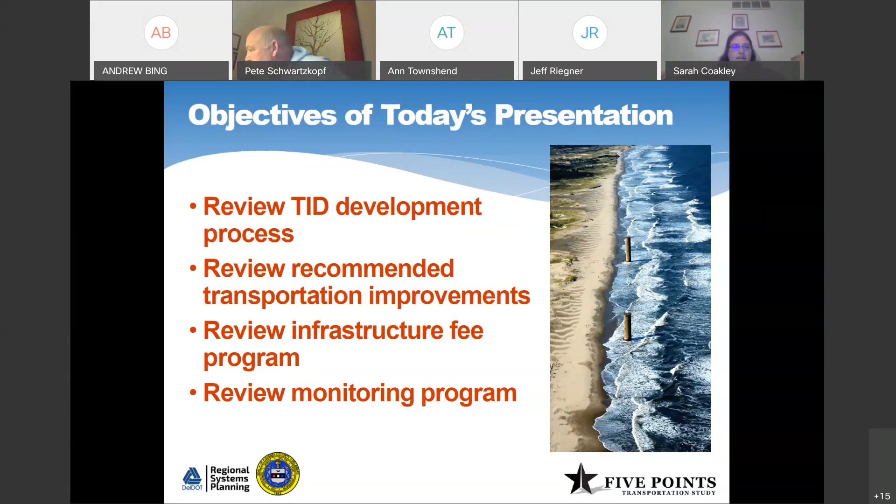So you may be wondering why we created the Henlopen TID. This slide covers the benefits of creating a TID. Sometimes we find ourselves developing improvements through DelDOT before we know all the traffic that they're intended to serve. The district process allowed us to plan more comprehensively so that we've already identified a list of transportation improvements to meet the needs of the anticipated future land use. Projects in the district's capital transportation program also advance in DelDOT's capital transportation program.

We have a 6-year transportation program, and projects within the TID get extra points in the ranking system that's used for prioritizing projects to add them into our 6-year CTP. The fees collected for the district function as transportation impact fees. So for the system to be legal, we have to use them on the district for which they're collected. The TID fees stay local and can only be used for the projects in the TID.

Oftentimes we hear from developers that they're not being treated the same as their competitors, and the district's fee schedule will at least reduce those complaints. The district's fee schedule also provides known costs for developers.

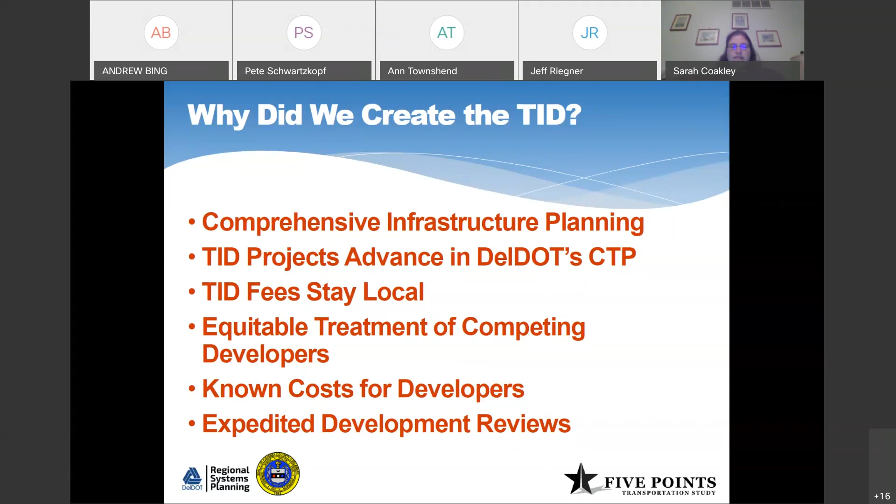They'll even be able to know what their costs are for transportation improvements before they even buy the land or buy into a project. And then the TID traffic analysis that was completed replaces the requirement to do a traffic impact study and make off-site improvements. So in that sense, development can move forward a little bit quicker than it normally would. The traffic impact study process can take 6 to 9 months, and that is a part of the process that developments consistent with the land use forecast for the district won't have to follow. Next slide, please.

So this slide shows the target horizon year of 2045, and this was the estimated build-out year for the land use forecast that Sussex County provided, and also for the transportation improvements. And that assumes a full build-out of the future land use forecast, which obviously may or may not happen by 2045. The target horizon year can be adjusted when the TID land use forecast or transportation plan is revised.

The pink area on this map is the participant boundary, which is the land area or parcels covered by the TID requirements. The purple segments and green intersections are the transportation facilities where the service standards apply and where transportation improvements have been identified. Since development in the TID impacts facilities outside of the TID, you'll notice that some segments and intersections are outside of that pink participant boundary.

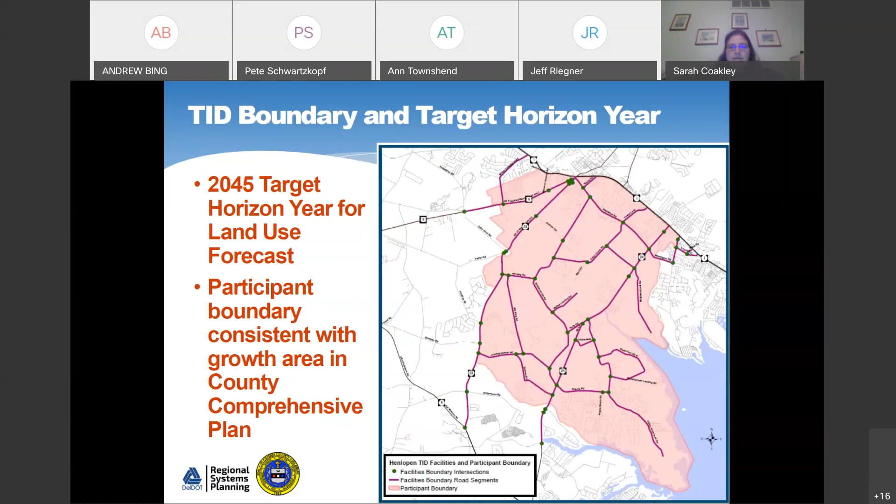Sussex County Planning and Zoning provided a 2045 land use forecast in May of 2018 based on existing zoning. This map shows that with the yellow parcels being those expected to have additional residential units, the red parcels expected to have additional non-residential development, and the purple expected to have a mix of both residential and commercial uses by 2045.

An estimated almost 13,000 additional housing units and almost 1.5 million square feet of commercial development is expected within the TID participant boundary by 2045 if full build out occurs. That means if all of the parcels are built out with the maximum land use that they could get. This is what DelDOT modeled in order to identify the needed transportation improvements.

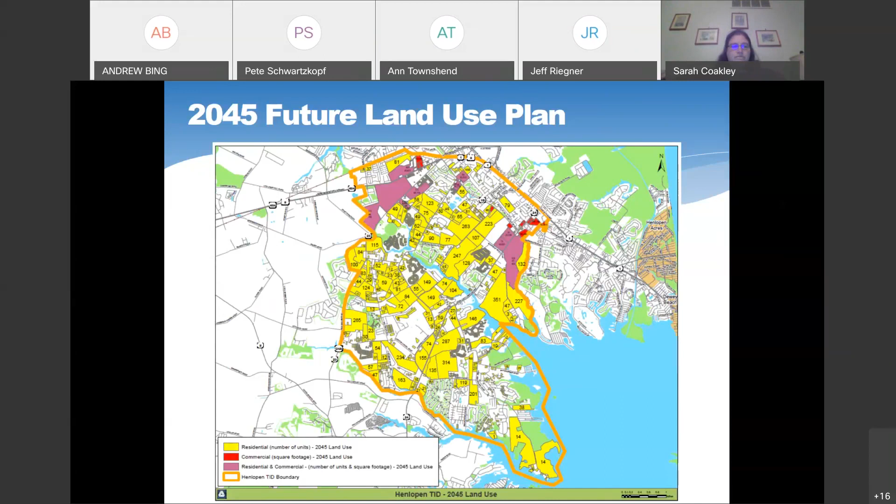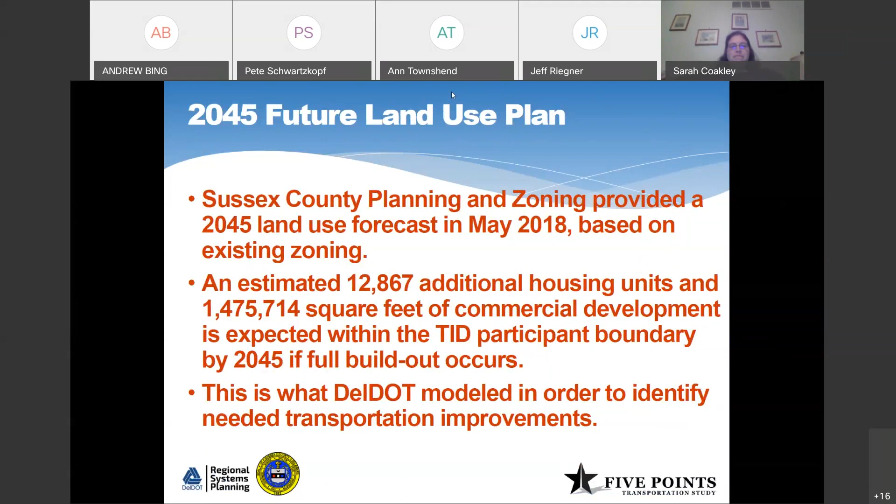Sarah, are you seeing the next slide? Because I see that it did go. I am not, but I will move ahead. No, I don't have it either. Jeff, are you there? You see the 2045 future land use plan, Sarah? Yeah, it should be the level of service slide. Okay. There we go, there we go.

So the results of the traffic modeling included level of service analysis for each intersection and each controlled approach, so each stop sign or traffic signal approach. Level of service is a measure of traffic delay at an intersection. This slide shows a visual of what each level of service A through F looks like.

Level of service A is free flow speed. Level of service B is reasonably free flow. Level of service C is stable operation. Level of service D is borderline. Level of service E is unstable. Level of service F is breakdown. The pictures there show what those different delays look like on the type of road shown there.

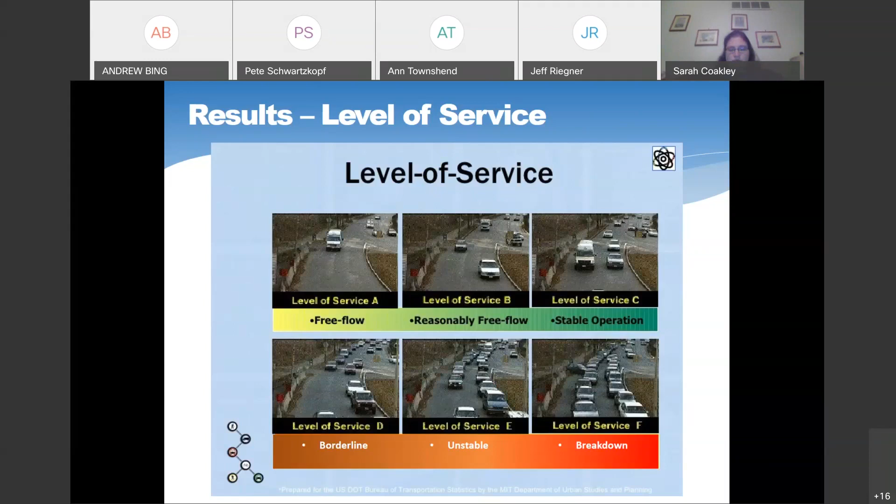In addition to conducting level of service analysis, DelDOT and Sussex County agreed on service standards in developing the plan for improvements in the district. Service standards define what should be considered adequate transportation facilities, and we used the following service standards as a basis for identifying needed improvements.

The minimum intersection level of service was an overall intersection level of service for weekday evening and morning peak hours at signalized, roundabout, and all-way stop-controlled intersections of D or better. This is the same level of service standard as included in our updated memorandum of understanding between DelDOT and the county. Also, all roadways within the facilities boundary of the TID are to be upgraded to DelDOT standards, including 11-foot wide travel lanes and paved shoulders with widths based on the functional classification of the roadway.

On state maintained roads, roundabouts were considered first as a means of intersection control. This consideration was part of a larger intersection control evaluation that also considered safety, capacity, right-of-way needs, and property impacts.

Compliance with our complete streets policy was assumed, with shared use path or sidewalk recommended along at least one side of every roadway proposed for other improvements. As development occurs, DelDOT will continue to work with DART to address opportunities for new transit facilities. Our regulations require some measure of public involvement in developing the standards. Sussex County and DelDOT co-hosted a public workshop last February in order to consider comments received on the service standards.

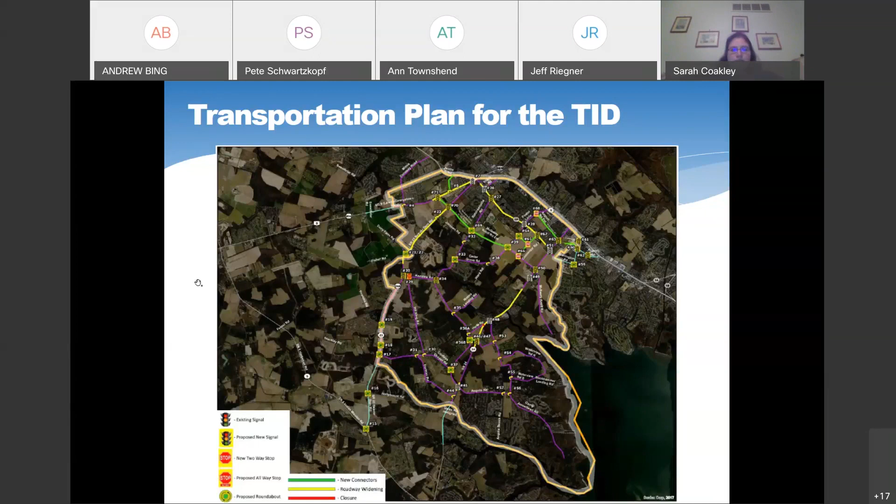This slide shows several new roadway connections proposed, including extension of Airport Road from Old Landing Road to Postal Lane, an extension of Mulberry Knoll Road to provide a connection between Cedar Grove Road and US 9, a potential new roadway connection between Plantation Road and Mulberry Knoll Road, and between Cedar Grove Road and the other new roadway, and upgrading Nassau Commons Boulevard from a private roadway to a state maintained road, meeting DelDOT local road standards.

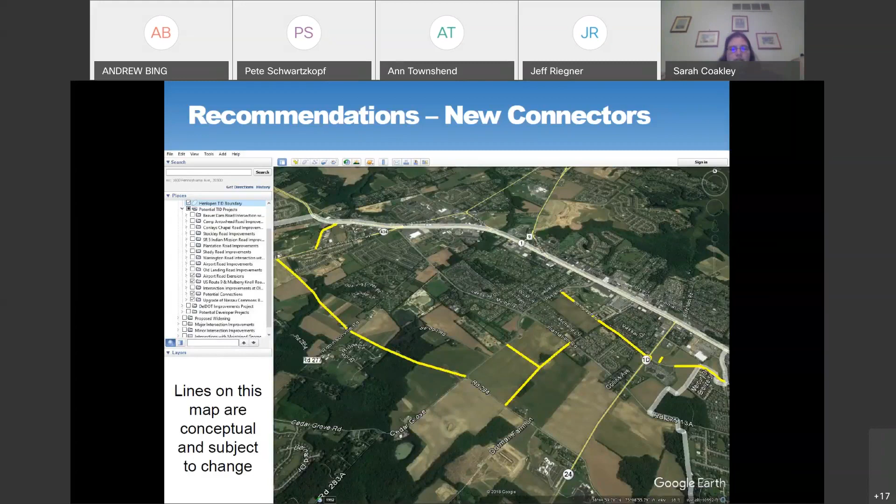Specifically, US 9 needs to be dualized from about 900 feet west of Old Vine Boulevard to Ward Avenue. State Route 23 also needs 2 through lanes in both directions from about 1,200 feet southwest of its existing intersection with Fisher Road to about 1,300 feet east of Deep Valley Road.

DelDOT currently has a planning and environmental linkages study underway looking at the Mulberry Knoll Road extension and Plantation Road. Based on traffic analysis alone, if the proposed Mulberry Knoll Road extension doesn't happen, Plantation Road may need 2 through lanes in both directions. With the completion of the Mulberry Knoll Road extension, the need for dualization is borderline.

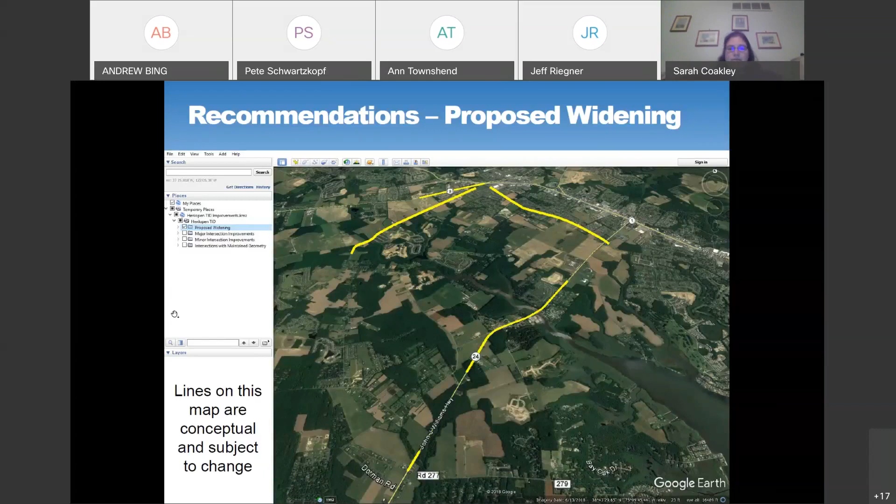There are 12 intersections in the TID where new traffic signals are proposed. Those in the 5 Points area north of Love Creek include Airport Road and Miller Road, Airport Road and Old Landing Road and Rehoboth Mall entrance, Airport Road extension and State Route 24, State Route 24 and Mulberry Knoll Road, Plantation Road and Craig Boulevard, Plantation and Robinsonville Road, Mulberry Knoll Road extension and State Route 23, and Mulberry Knoll Road and US 9.

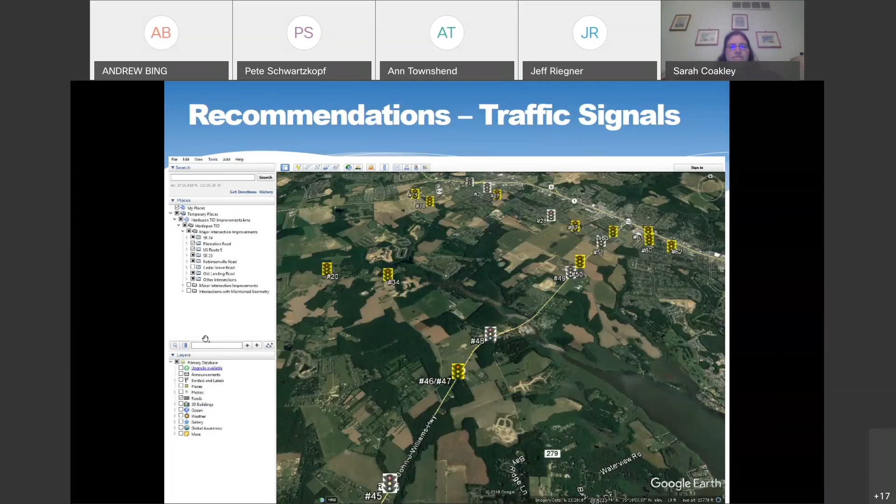Those in the 5 Points area north of Love Creek Road include Warrington Road and Old Landing Road, Cedar Grove Road and a new connector roadway, Cedar Grove Road and Mulberry Knoll Road, Cedar Grove Road and Robinsonville Road, and Robinsonville Road and Mulberry Knoll Road extension.

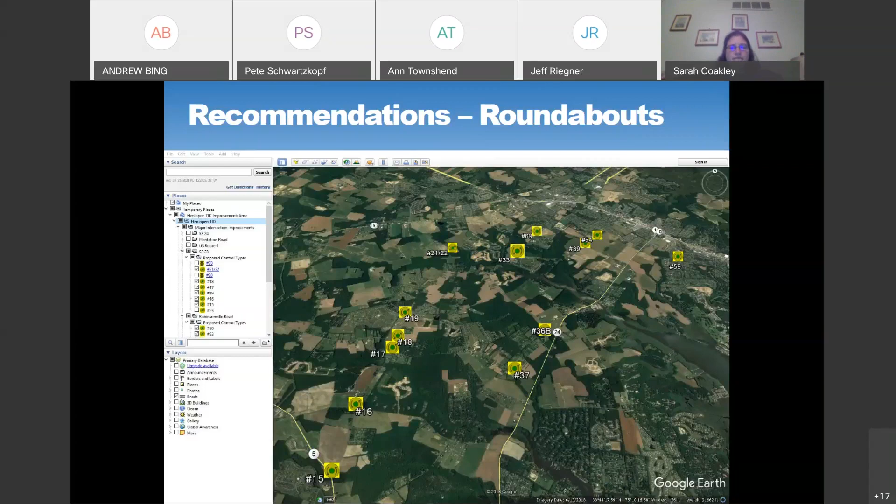Turn lanes are also proposed along Old Landing Road for access improvements to existing subdivisions.

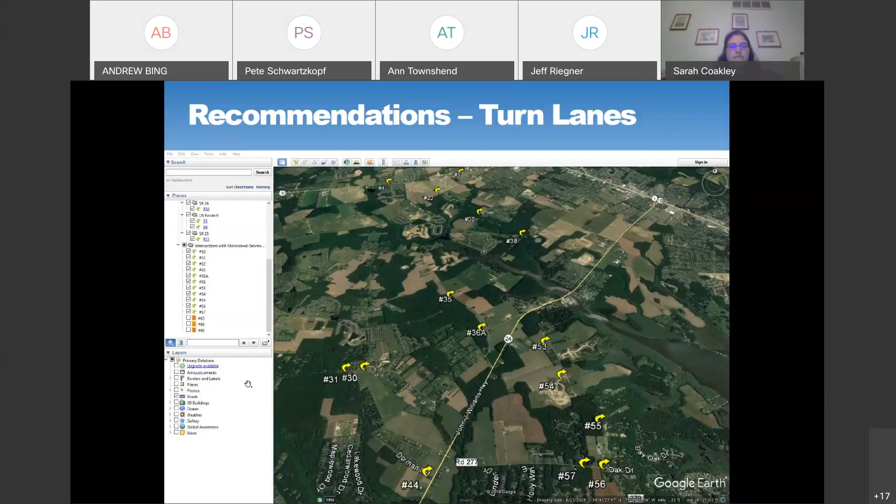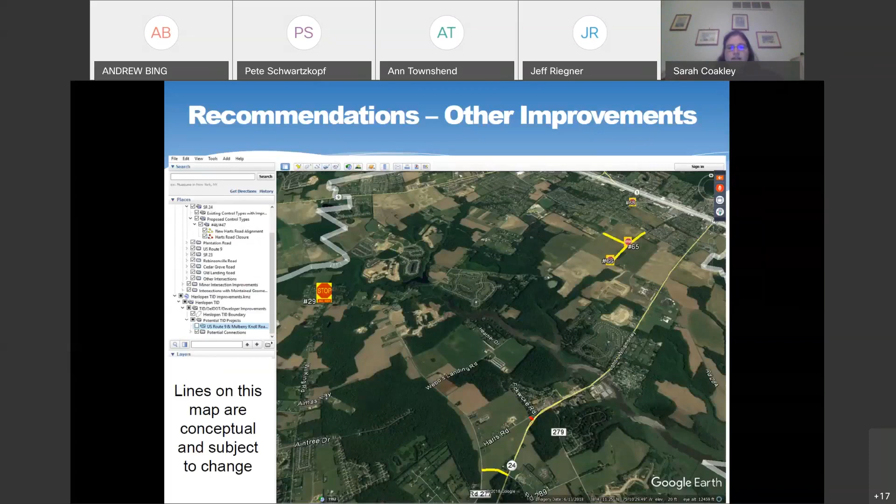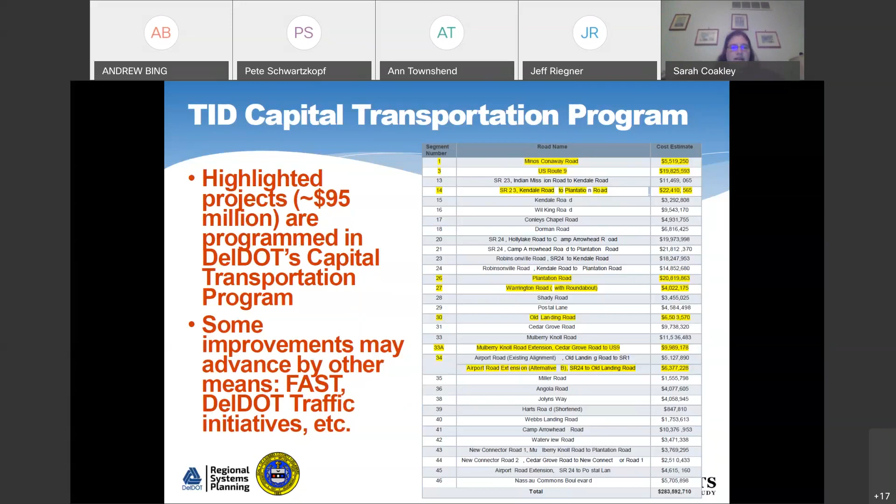The single family detached residential rate is currently $4,900 per unit if paid by phase, or $5,145 per unit if paid by lot. For multifamily residential low-rise, which is 1 to 2 floors, and townhomes, the rate is $3,822 per unit paid by phase.

Multifamily residential mid-rise, 3 or more floors, is $2,842 per unit by phase. If paid by individual lot, there's an additional 5% charge for the administrative cost of processing multiple smaller payments. For non-residential, rates are based on the number of trips per 1,000 square foot gross floor area, ranging from $2.88 per square foot for uses with the least trip generation to $4.88 per square foot for uses with the greatest trip generation.

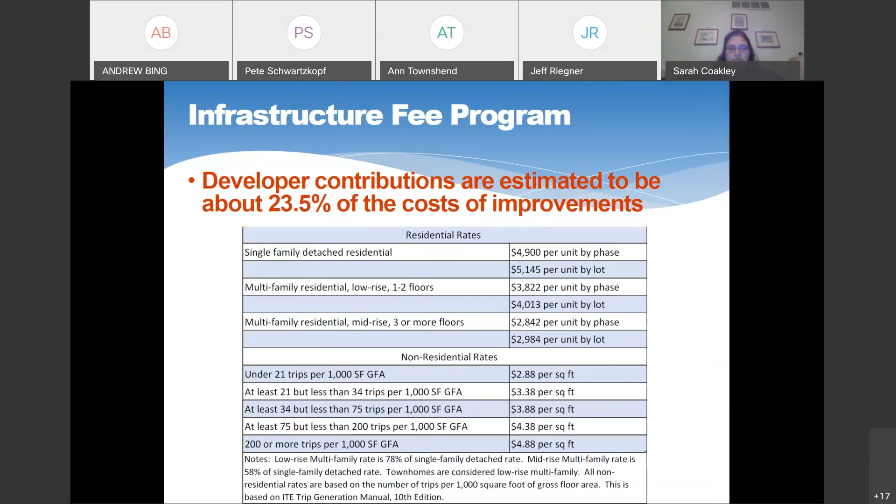The infrastructure fee program calls for the county to collect fees prior to issuance of the building permit. The county will hold the fees in a single TID account and transfer them to DelDOT when DelDOT requests funds for the agreed-upon transportation improvements. The manner and extent of developer participation will be documented on both the recorded subdivision or site plan and in an infrastructure recoupment agreement.

Developers can either pay the fee outright or, with the concurrence of the county and DelDOT, build improvements for credit against their fees owed. Next slide, please.

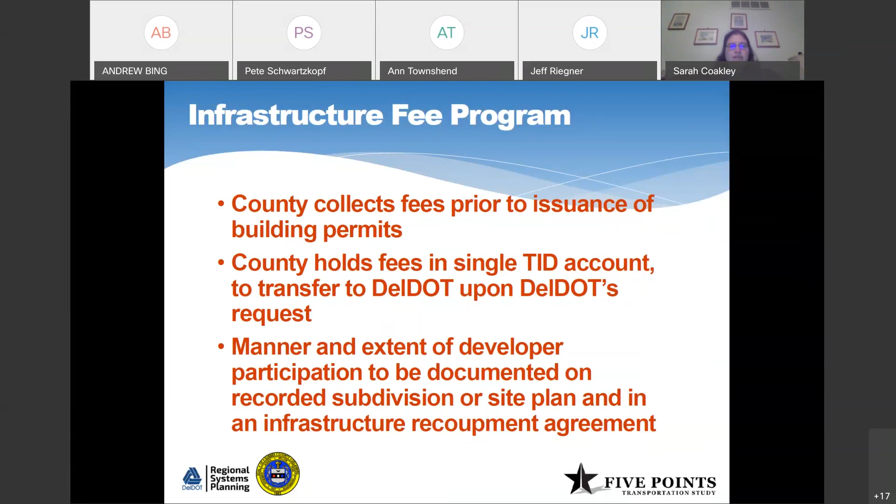There are a few development types excluded from participating in the TID. This includes developments determined by both DelDOT and the county to be inconsistent with the future land use plan and to generate enough traffic to warrant a TIS. To warrant a TIS, a development must generate at least 50 peak hour trips or 500 daily trips. So if the difference between what's proposed and what was included in the future land use plan hits that threshold, generating more traffic, they'll still be required to do a TIS and contribute to offsite improvements.

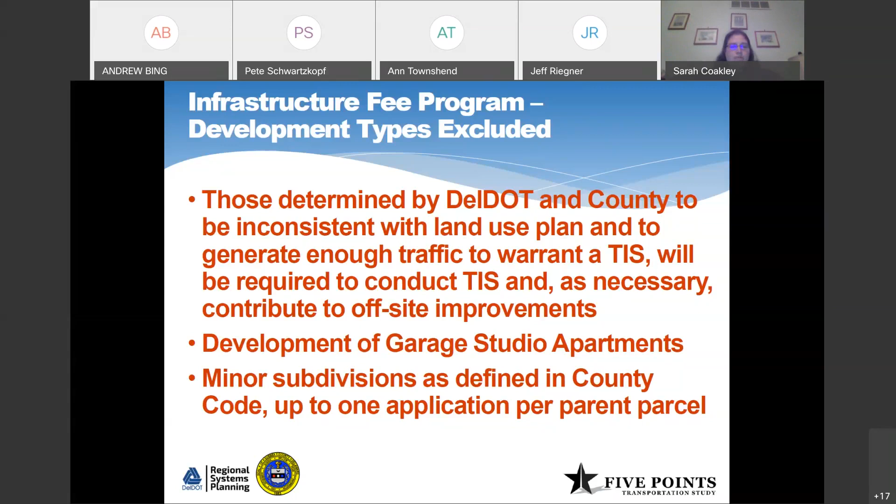The development of garage studio apartments is also excluded from participating in the TID, and finally, minor subdivisions as defined in county code, with up to one application per parent parcel. Next slide, please.

DelDOT and the county are working on finalizing a fee calculation and submittal form that developers will fill out and submit along with their fees. It will be a fillable Excel form that calculates the fees - they just need to enter the number of units and square footage for non-residential buildings by ITE land use codes, and the form will calculate their fees. Next slide, please.

As mentioned at the beginning, a TID is not static - it doesn't necessarily stay the same. Traffic conditions can change, the housing market and demand for non-residential can change, so the build-out rate and future land use can change. That's why monitoring is going to be very important.

The monitoring program includes a commitment from DelDOT to monitor traffic volumes in the TID and provide the county with findings and recommendations. The first report will be in calendar year 2022, since the traffic counts initially used will be 5 years old by then, and we're committing to provide additional updates at least every 5 years after that.

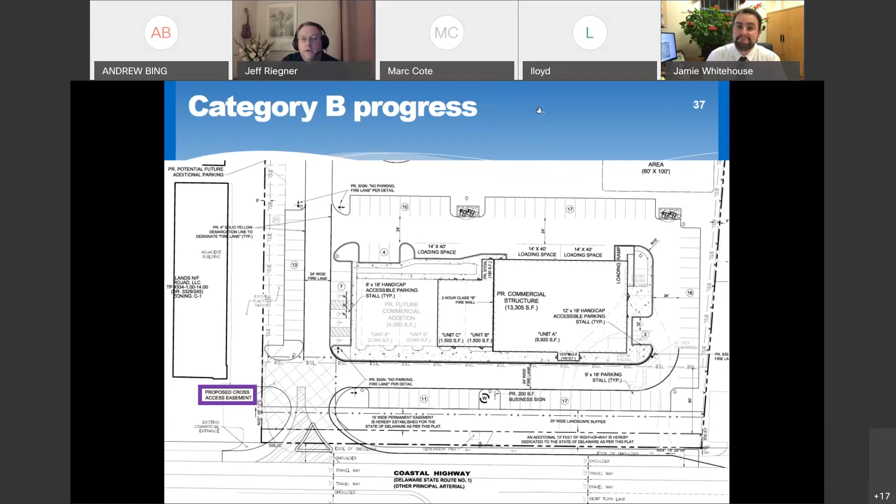Thank you, Jamie. Are there any questions from the working group for Jamie before he signs off? Okay, hearing none. Thank you, Jamie. Thank you.

Our next item is also related to Sussex County, so there may be some questions for you, but it also involves DelDOT, and that's modifications to either land development requirements from the county's perspective or the development coordination manual that would require additional buffers or setbacks for new developments for future road expansion. From the county's perspective, last year a potential revision to the zoning code was discussed to clarify the maximum extent to which parking may be permitted in the front yard setback versus leaving that area entirely clear for potential future uses.

From DelDOT's perspective, they've updated the development coordination manual to require greater width along principal arterials. Good examples are US 9 and SR 23, which are the roads most likely to require future widening. That requires 50 feet of right-of-way from the center line, so a total width of 100 feet of right-of-way, plus a 15-foot permanent easement outside the right-of-way on each side. That means there's a total clear width of 130 feet, which provides greater opportunity for widening these highways in the future as traffic demands require.

Based on the progress made by both the county and DelDOT on this issue, we're calling this recommendation in progress. Are there any questions about this from the working group?

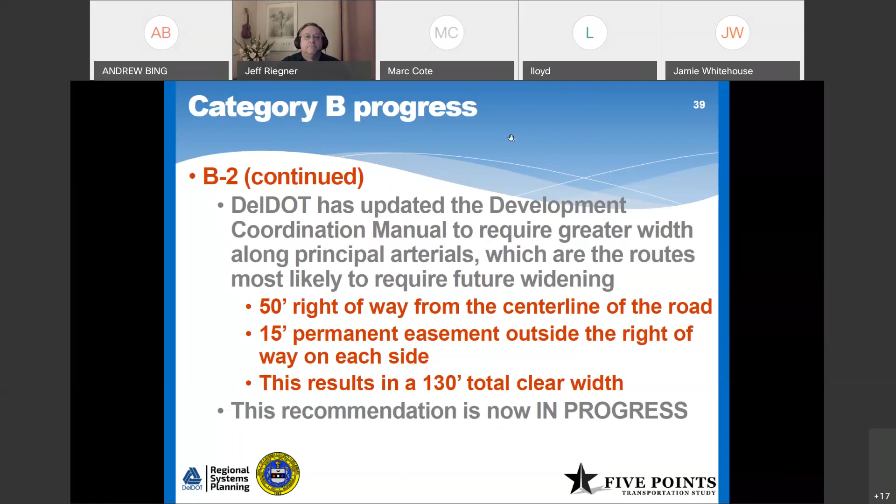Recommendation B3, we have already called complete, and that was modifying the signage southbound on Route 1 in Milford to encourage people to make good choices about their travel routes. We just wanted to update you: last time we mentioned DelDOT was testing travel time messages. They're now on full time. It's quite likely that may change so it just happens during peak periods, so the message isn't up all the time. But that functionality is 100% complete now and being used by DelDOT on a regular basis.

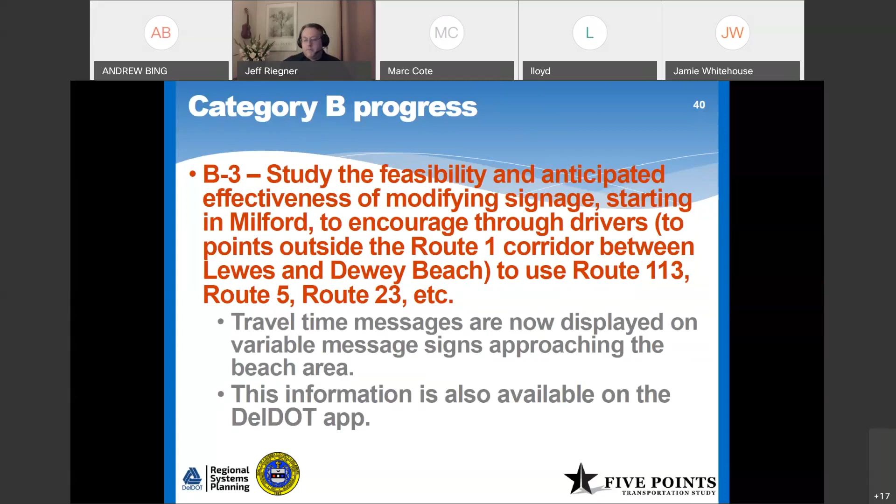B7 was continued TID studies both east and west of Route 1. You heard in great detail from Sarah that the Henlopen TID has been approved, so this recommendation is now considered complete.

I mentioned earlier recommendation B8, the parking management system. The idea was, just to remind those not part of the process originally, that folks oftentimes will be driving to the beach area, going somewhere. Cape Henlopen State Park is a destination that probably came up more often than others. They drive all the way through the highway system to get to Cape Henlopen State Park. It's closed because the parking lot is full, so they have to go back out and choose to do something else with their day, or find other ways to get there, which creates additional traffic in the network.

So what we're looking to do is work with DNREC and other folks who own large parking lots in the area that could potentially fill up, to find out what their issues are with parking, and see if there are opportunities to provide transit service from either the Lewes or Rehoboth Park and Rides to those destinations, then let drivers know in advance. There would be some type of sign saying parking at Cape Henlopen is full, you need to park here and take the bus. We're just getting started with that, coordinating with DNREC to find out what data they have for the state park parking lot filling up, and we will be advancing this through the course of 2021.

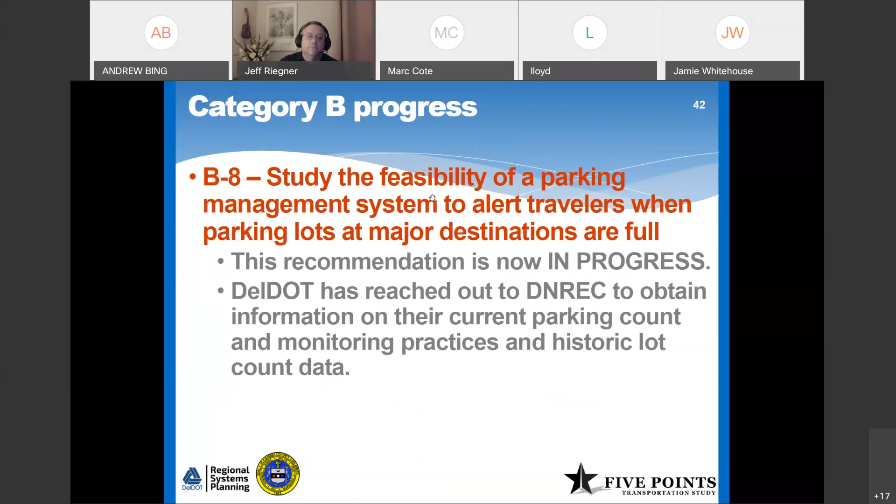B9, study enhancing New Road for the byway master plan. The byway master plan was approved last year, so this recommendation is now ongoing. There are multiple projects incorporating the recommendations of the New Road master plan. Probably the most public-facing one so far is the reconstruction of the Canary Creek Bridge, where the width of the bridge and its approaches were designed specifically with the recommendations of the byway master plan in mind. That project is just at a conceptual stage, but will be moving into final design this year. Likewise, developer improvements along frontages on New Road are being required to comply with the provisions of the master plan as well. So this is being considered ongoing.

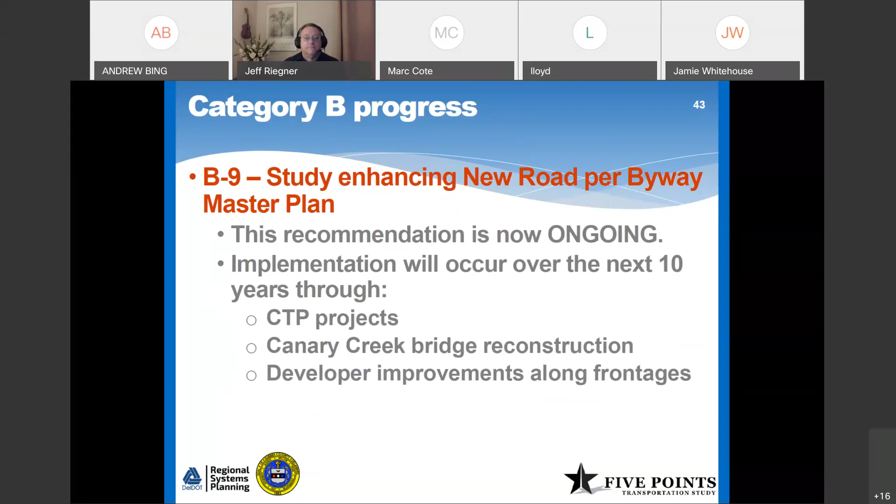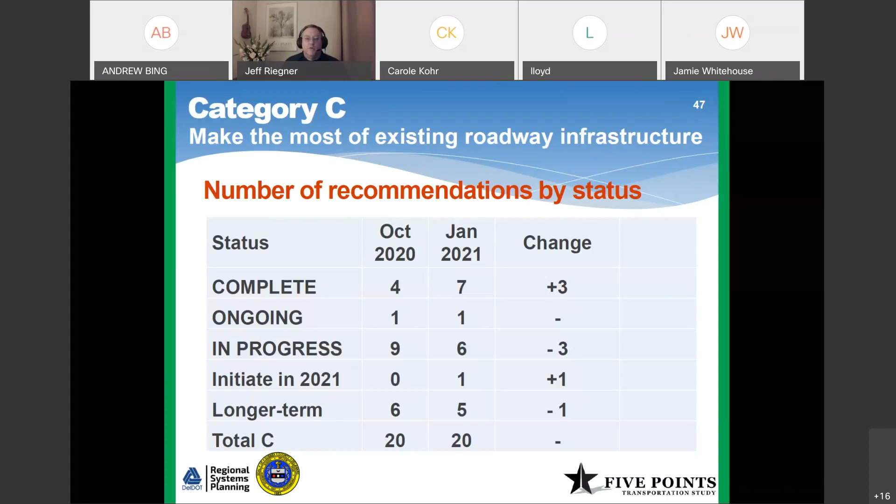You got it. So category C is making the most of existing roadway infrastructure. This is where we start to get into the physical changes, construction projects and such. There are four different projects that have been moved up in status in this category. For C1, that is conducting a corridor study on Route 9 to determine the feasibility of widening to four lanes. This is just a clarification. This widening, as you heard from Sarah, was recommended by the Henlopen TID study. We mentioned before that a project to move this forward is in the CTP and it remains there, so that is going to be happening shortly.

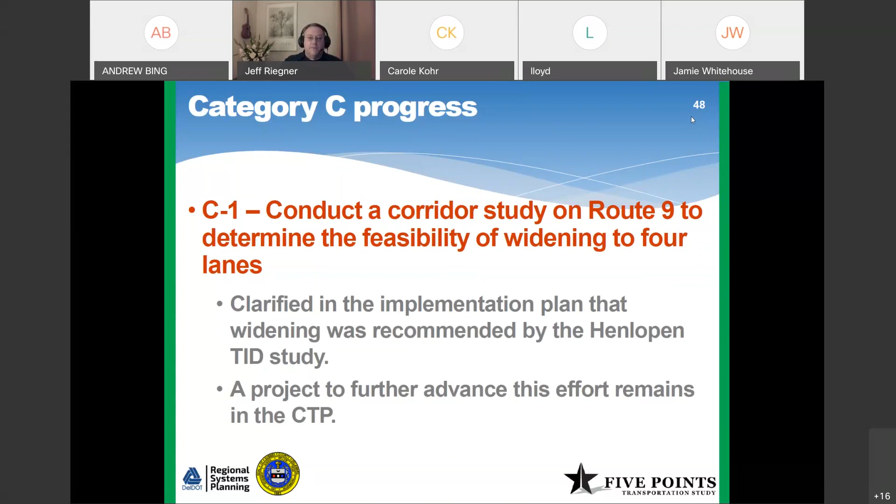C3 was to initiate a capital project to improve the intersection of Old Landing and Warrington Roads. That project has been initiated. It's in the CTP, so this recommendation is complete.

Next is improvement of the intersection of Cave Neck Road, Sweetbriar Road, and Hudson Road. We mentioned before that this project is programmed. Design was originally scheduled to start in FY25. Shantae's going to speak briefly about the FAST program, which was approved by Sussex County Council, which is going to allow this project to move forward more quickly.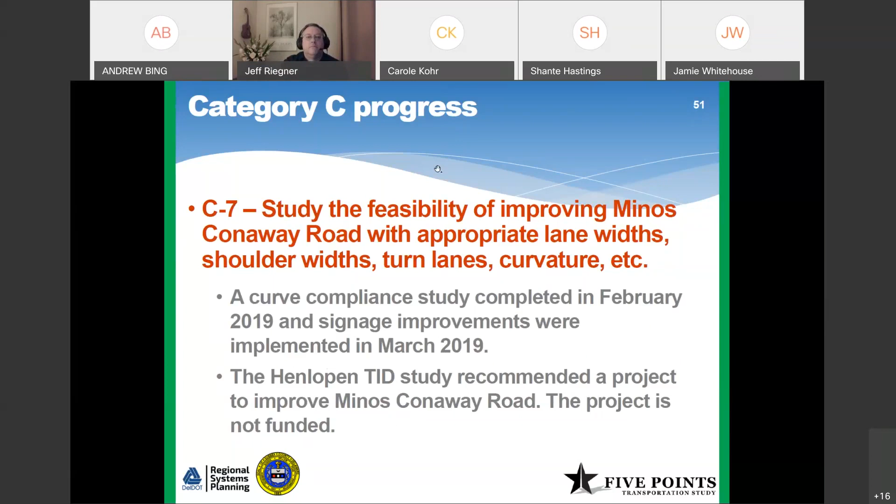We're recommending initiating recommendation C14. Hey Jeff, I'm just going to interrupt you for a second. I'm sorry, I was slow on the trigger, but Speaker Schwartzkopf has a question.

Shante, do you know if the details of that project have been determined yet? Because I don't know if design has started. Design has not started, but we are anticipating doing some public outreach this spring to present different design alternatives for the project. Representative Schwartzkopf, when it says the recommendation is complete, the recommendation of the 5 points working group, which said to initiate a capital project, that piece is complete. The project itself isn't complete, the work isn't complete on it, but that piece is complete.

Yeah, I was under the impression that they were going to have some meetings where people could come out and complain about either the light or a circle, either one. The way this was put out there, it sounded like you had made a decision on that, and I was pretty sure that hadn't happened yet. I want anybody else on this listening from that area to know there will be some future input from the public on that intersection. Thank you. Thanks for clarifying. Yeah, I appreciate it, Speaker.

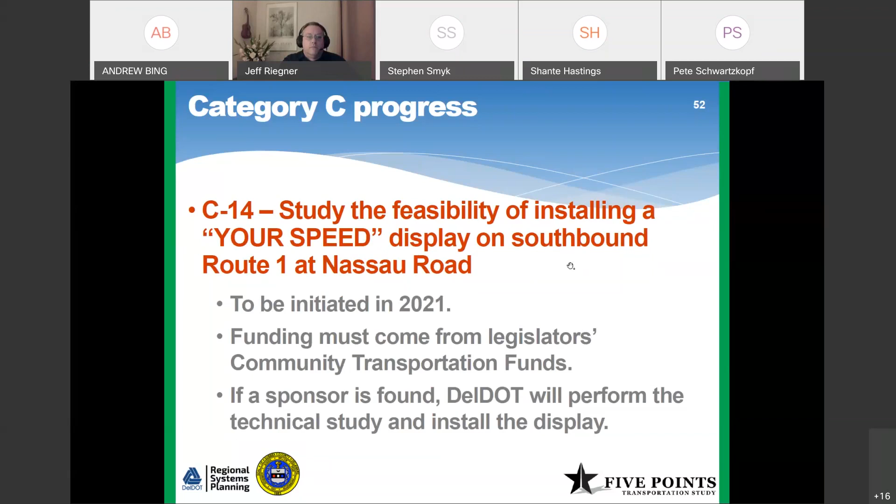Jeff, Bob Fischer has his hand up. Great. Hi, Bob.

Without getting into politics, it appears that we are getting into more of a surveillance society rather than improving safety. I've never been opposed to speed cameras as long as they worked appropriately. I would look at putting speed cameras about every 3 miles along southbound 1 from Route 16 down to 5 Points intersection, once the Route 16 traffic light is taken away. Because people are going to come crashing down there at 75 miles an hour and then run into people along Cave Neck and Minos Conaway. So I hope I don't get hate mail and death threats for putting this on the table.

But as a 46-year engineer with lots of safety engineering and risk management as part of my work, when you launch satellites, you've got to make sure they don't crash down and kill people, or rockets or missiles. I just think that unmanned speed cameras that send out fines - I know it works in the Washington D.C. area because they're all around, particularly in Maryland. I don't think they're legal here. So anyway, that's just my thought.

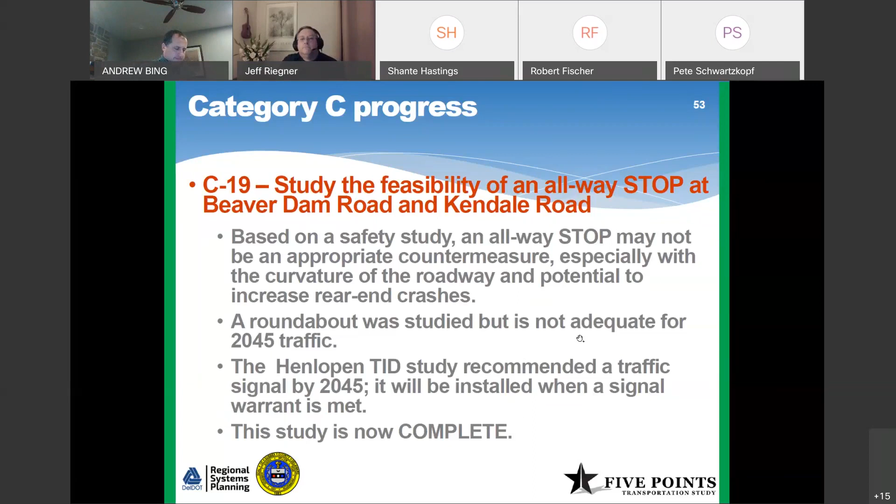So the feasibility study is done. It was determined to be feasible. The intersection is now in final design. So this study is now complete.

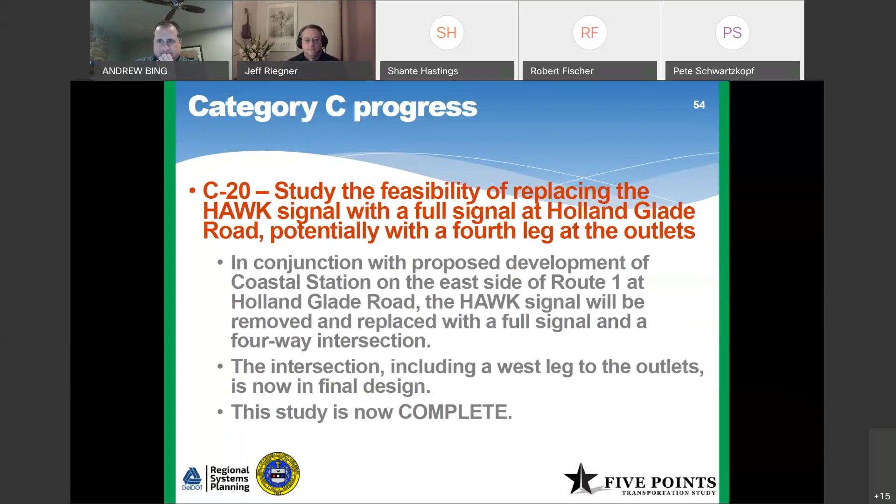That's it for category C. We took some questions as we went along, so I'm going to assume that if someone had a question, they would ask it now, unless I see a hand pop up.

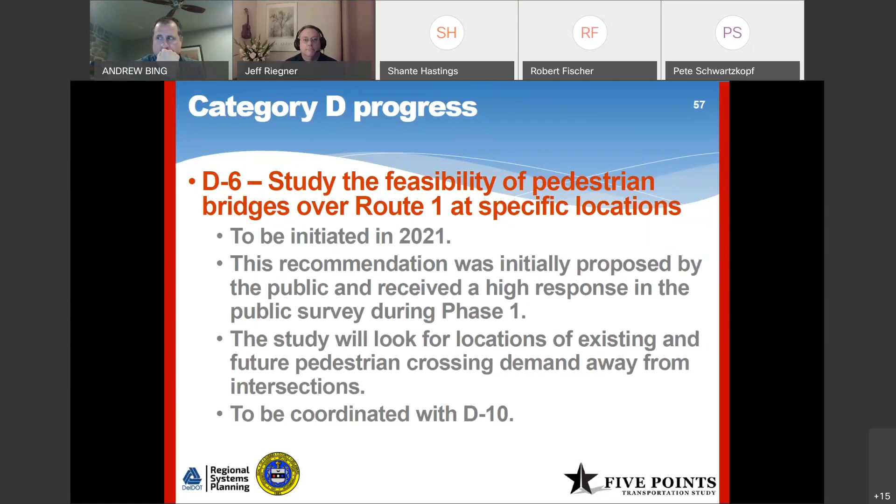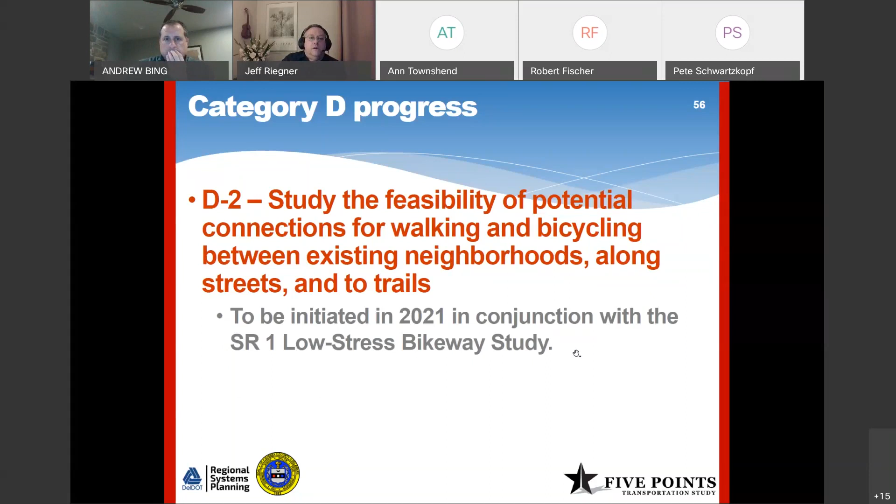What locations should we look at in terms of potential pedestrian bridges on Route 1? Again, we're looking at places where you see people walking across mid-block today, or that you're aware is a place people are trying to access mid-block that they would benefit from being able to cross over. So if there happen to be a couple ideas that working group members have, we'd love to hear them now.

Well, I, for one, am not in favor of overpasses. I will say that if there were to be one, the place I'd put it is where the Hawk signal is, right by the outlets. You have the crossover from outlet to outlet, but then again, you're going to eventually put that intersection in there. They'll have crosswalks and everything to be able to cross there.

I can tell you there are spots up and down the highway, but nothing consistent. Like Kmart, there used to be traffic back and forth there, but now that place is gone. It's going to be a grocery store now. But I don't know, you go up to Atlantic Liquors, but that's a crosswalk there too.

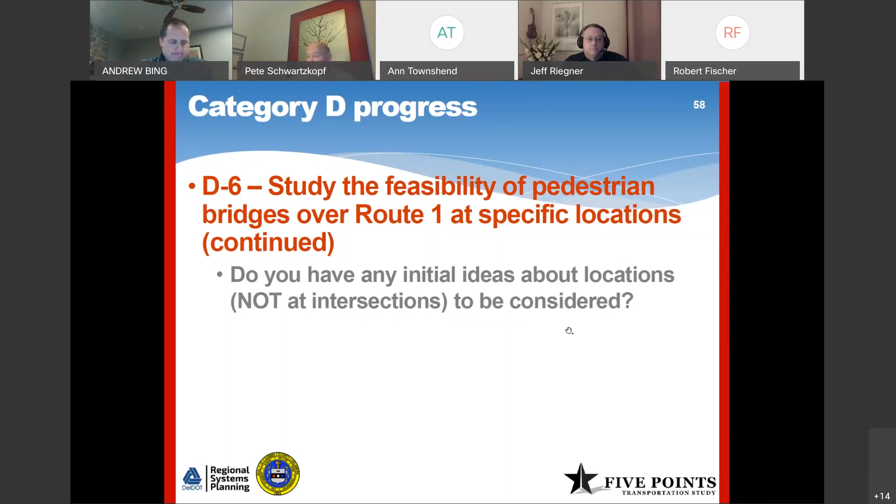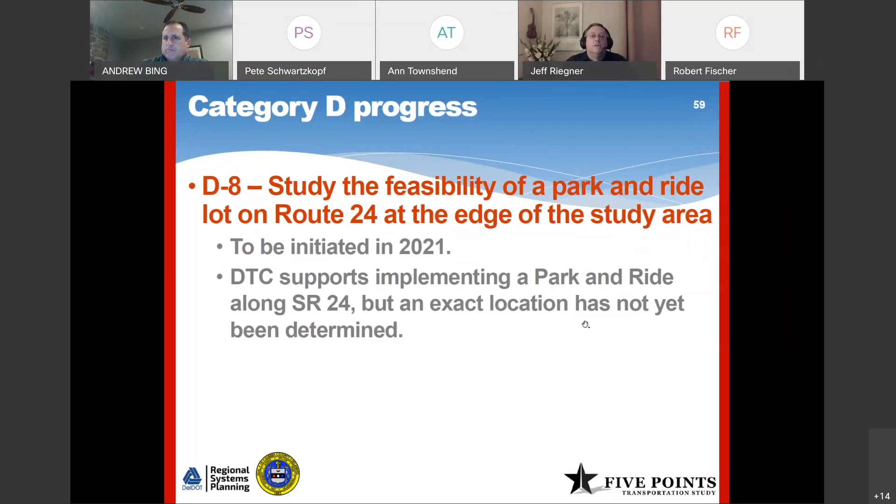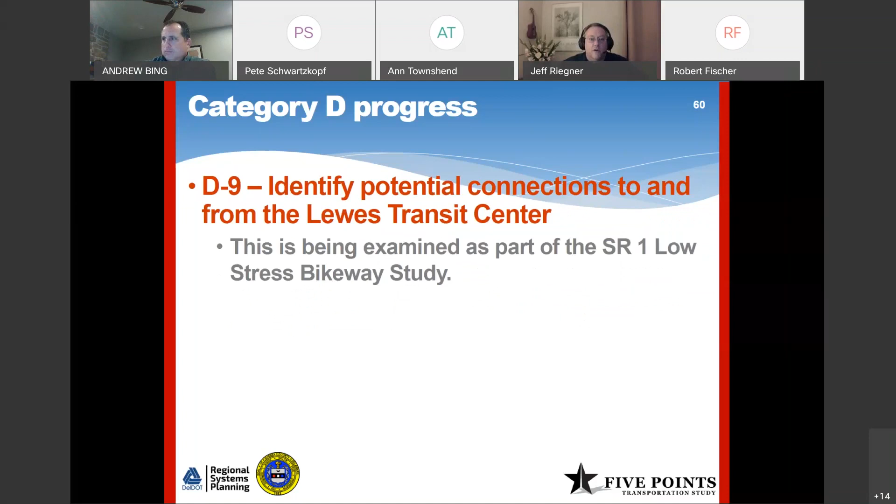D9, we did just hear about this a little bit, and this is identifying potential connections to and from the Lewes Transit Center. This will be looked at as part of the low-stress bikeway study. We have heard a lot of people, and certainly heard it again tonight, looking at Shady Road and Marsh Road as a potential opportunity for crossing for walking and biking.

And then D10, this goes hand in hand with D6, so we'll probably just lump those together in future updates. A pedestrian bridge is only effective if you provide a barrier in the median so that people do not cross at grade. So those two recommendations are part and parcel of each other.

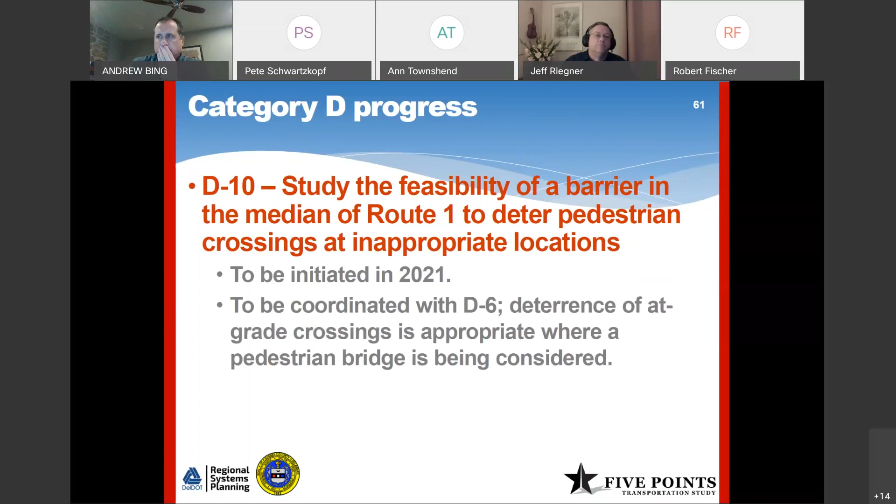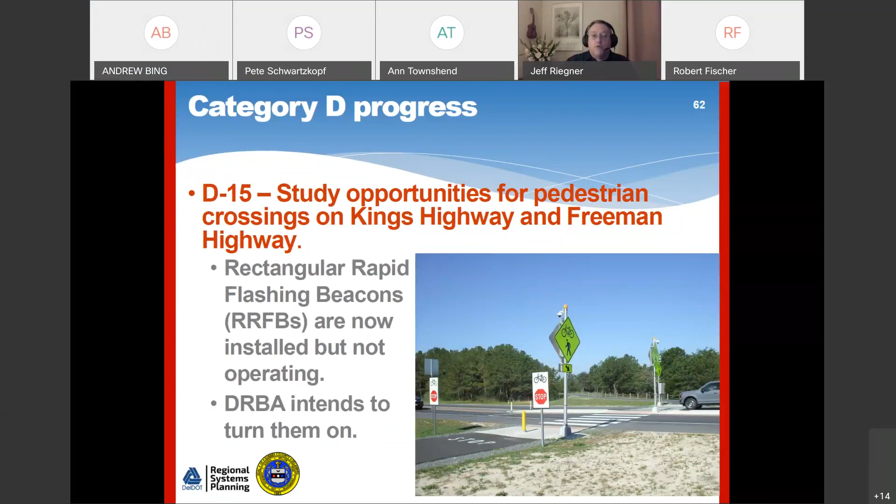And then finally, looking at opportunities for pedestrian crossings on Kings Highway and Freeman Highway. I'm sure many of you have seen the rectangular rapid flashing beacon - us engineers, we do love our acronyms - installed, but not yet operating. DelDOT is working with DRBA, who owns that, to get it going.

I'll just briefly go into E, and then I'll see if there are any final questions before I wrap up. There are no new recommendations advanced under category E.

The recommendation E7 was looking at a connection - if you could picture north-south along the west side of Route 1, the line with the intersection of Old Landing Road and Airport Road. There are a couple of sections to that. One is north from Old Landing to Route 24, so that element of the extension is in progress. It's not yet clear how that extension could work north of 24 going up to Postal Lane, but existing developments may or may not render that feasible. So DelDOT needs to determine whether that is something that can continue to work in the future.

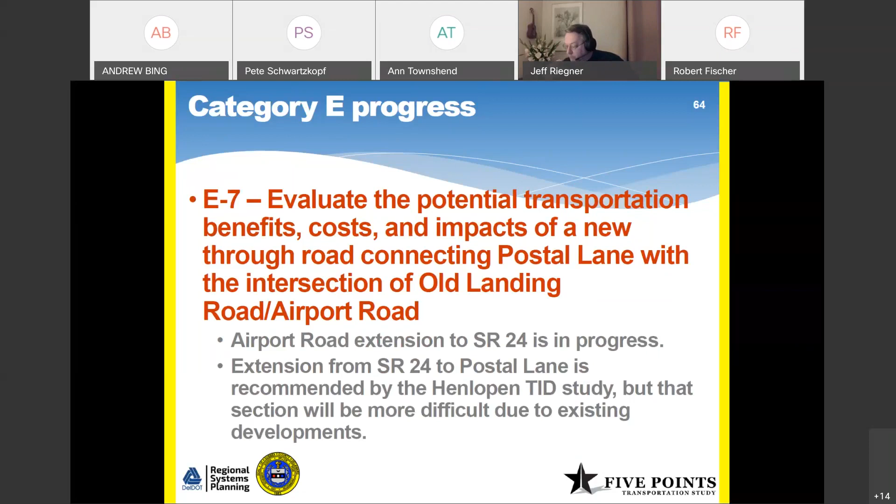With that, I'm happy to take any further questions, Jeff, last questions. I think Gail has her hand up. Gail, why don't you come off mute and go ahead? Okay, we can hear you. Yes.

On opportunities for pedestrian crossings on Kings Highway, I wanted to bring to your attention, it's not on our list, but having been out there recently for some events, crossing over that road and trying to get to the bike path when parking at the high school - a lot of people park at the high school and cross Kings Highway to access the J&B Trail. So I think it's important to consider a pedestrian refuge there in the center of that road, because even with the push button light that you can change to cross, when you get out in the middle of that road with traffic coming from different directions, and a lot of traffic coming out of the high school when it's letting out with young drivers, et cetera, you can get stuck out in the middle there. There's no pedestrian refuge there, and I would like to put that on the table to be considered.